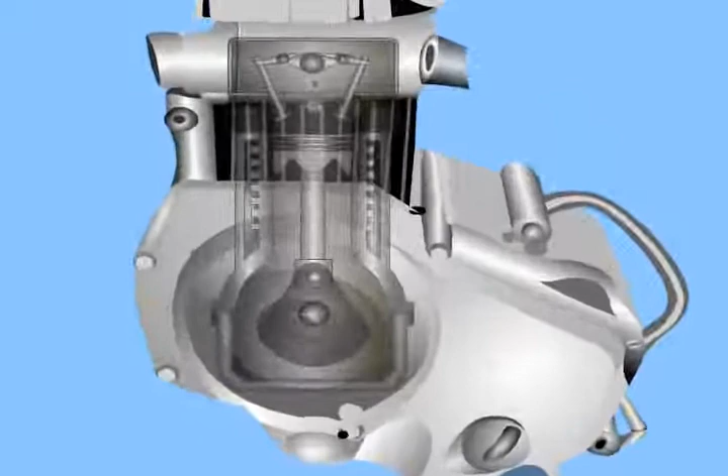Hello friends, everyone knows what a motorbike is. But how many of you know the working principle of a motorbike and its engine? In this presentation, we will give you a brief explanation of the working principle of a 4-stroke petrol engine, which is also known as IC engine, that is internal combustion engine.

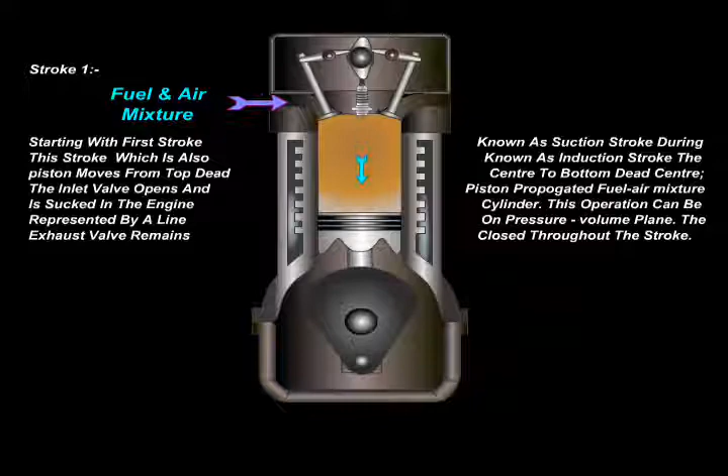The first stroke is known as suction stroke, also known as induction stroke. During this stroke, the piston moves from top dead center to bottom dead center. The inlet valve opens and the fuel-air mixture is sucked into the engine cylinder. This operation is represented by a line on the pressure-volume plane. The exhaust valve remains closed throughout this stroke.

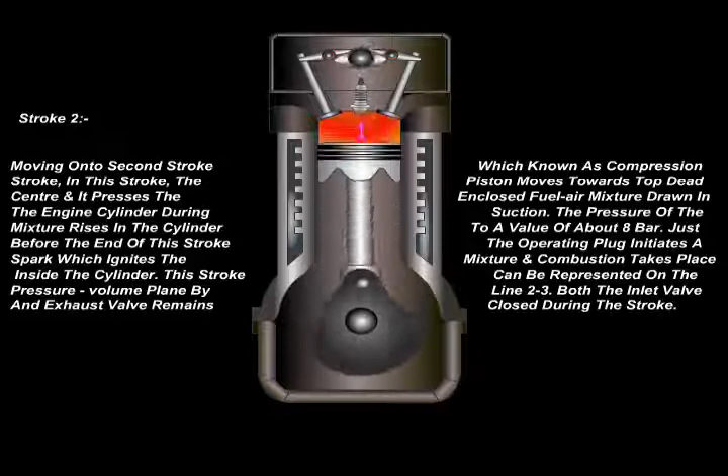Moving on to the second stroke, known as compression stroke. In this stroke, the piston moves towards top dead center and compresses the fuel-air mixture drawn in during suction. The pressure of the mixture rises in the cylinder to a value of about 8 bar. Just before the end of the stroke, the spark plug initiates a spark, which ignites the mixture and combustion takes place inside the cylinder. This stroke is represented on the pressure-volume plane by line 2-3. Both the inlet valve and exhaust valve remain closed during this stroke.

Now let's see the third stroke, known as the working stroke. When the mixture is ignited by the spark plug, gases are produced which drive the piston from top dead center to bottom dead center, and thus work is obtained in this stroke. It is during this stroke that we get work from the engine, the other strokes - suction, compression and exhaust - being idle. The flywheel mounted on the shaft stores energy during this stroke and supplies it during the idle strokes.

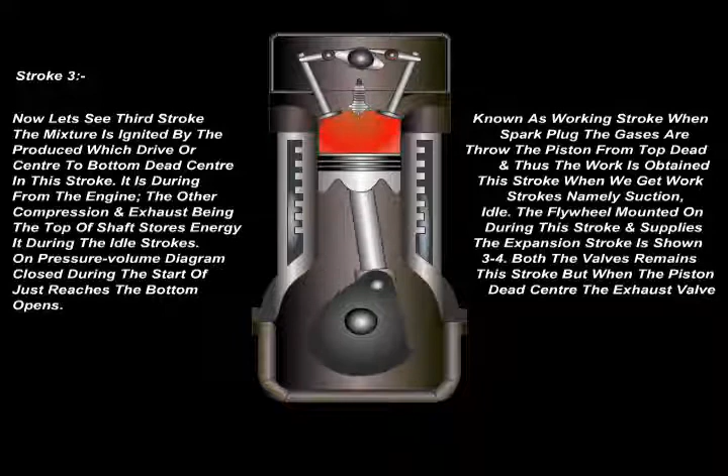The expansion of gases in this stroke is shown in the pressure-volume diagram by line 3-4. Both valves remain closed during the start of the stroke, but when the piston just reaches bottom dead center, the exhaust valve opens.

Moving on to the last stroke, known as exhaust stroke, the last stroke of the cycle. Here, the gases that have been collected become useless after the completion of the expansion stroke and are escaped through the exhaust valve to the atmosphere. This removal of gas is accomplished during this stroke. The piston moves from bottom dead center to top dead center and the exhaust gases are driven out of the engine cylinder. This is also called scavenging. This operation is represented by a line 1-5 on the pressure-volume diagram.

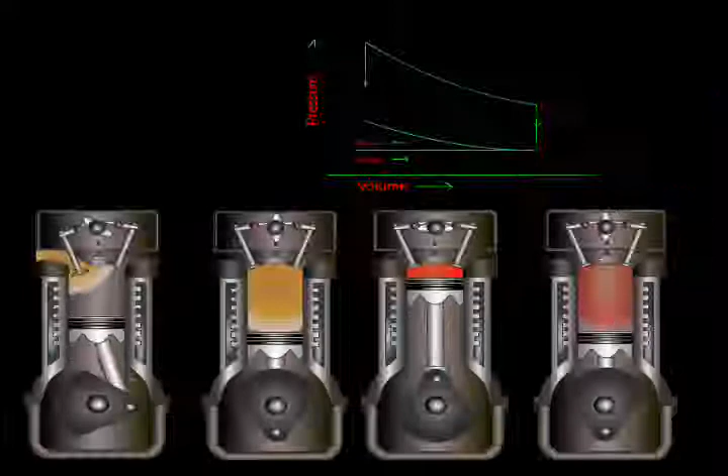With this, we come to an end of our presentation. We hope that you all have understood the working of the 4-stroke petrol engine.